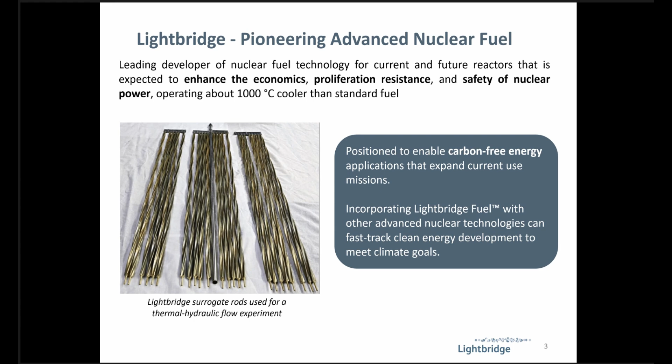This is a much more proliferation-resistant fuel that will matter for deployment in numerous countries around the world. It will improve the economics of the SMRs. This fuel will run about 1,000 degrees Celsius, about 1,800 degrees Fahrenheit cooler down the center line of the fuel than current fuel in reactors, and that relates to some of the very significant safety advantages that the fuel will bring.

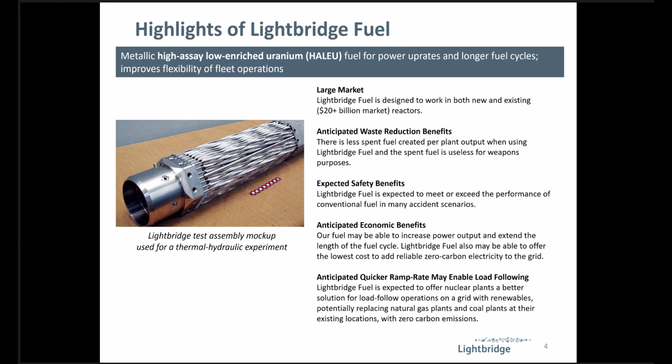This is a picture of a mock-up of a fuel assembly. We are designing for many different types of reactors. This is for a Russian VVER type reactor, a variant of a pressurized water reactor. And the fuel rods are optimized for each different kind of reactor. So for example, on this next slide, you can see one of the rods we designed, and this went through some testing. Now, this is a cross-section of one of the rods for a VVER, where we have 3 lobes. For a PWR, a Western, say Westinghouse type reactor like Seabrook, this would have 4 lobes instead of 3, would look more like a plus sign.

One of the many benefits that we've designed for is no spacer grids. So to hold the rods together in the core of the reactor, there are no grid straps, no spacer grids that block the water flow. So that is what's partly responsible for the power increase, that the water just flows much more unimpeded up from the bottom through the top of the fuel assembly and around again.

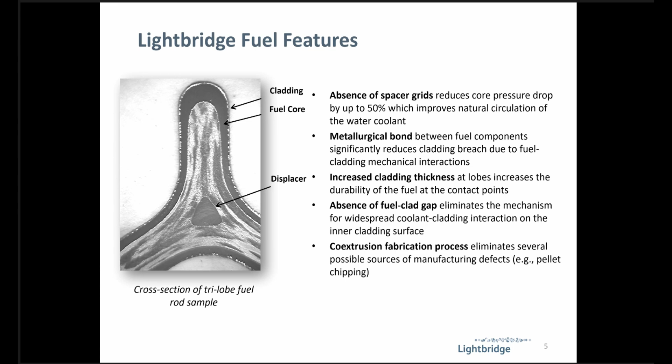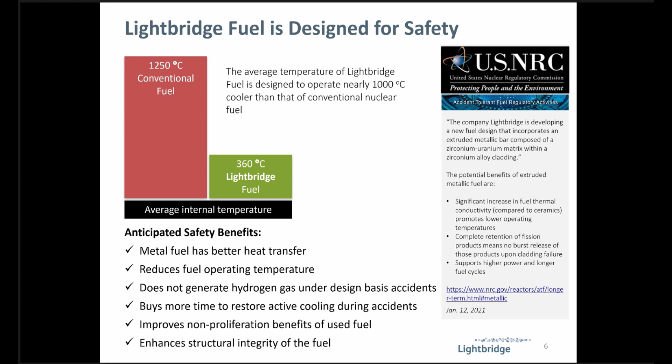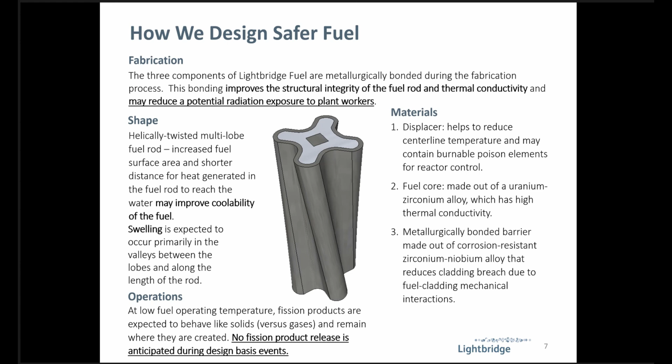We have designed the fuel and patented it. We've also designed and patented the manufacturing methods for this fuel. I'll only pick out a few things on each slide, and we'll get to your comments, questions later if there's anything you want to focus on.

As you know, the capacity factors are very different for different energy sources. The renewables are quite intermittent as the wind blows and the sun shines. Nuclear has the greatest capacity factor. You know, think of capacity factor as if the plant can run at 100% of the time, 24 hours a day, every day of the year.

Fleet-wide, nationally in the United States, nuclear is about 92.7%. Some of the reactors are over 95%. And virtually all of that downtime is planned years in advance for the spring or the fall when power isn't needed as much and the reactors can be refueled and have maintenance on them.

But the utilities want to increase these capacity factors more, including the ones that we've been working with. And by lengthening the fuel cycle and by actually with this fuel allowing a much quicker ramp up from an outage to full power and a much quicker ramp down that you can't do with the pellet and tube fuel that goes up and down in power very slowly, this also increases the capacity factor of the reactors by getting it up from that outage so quickly and then back down into the next one.

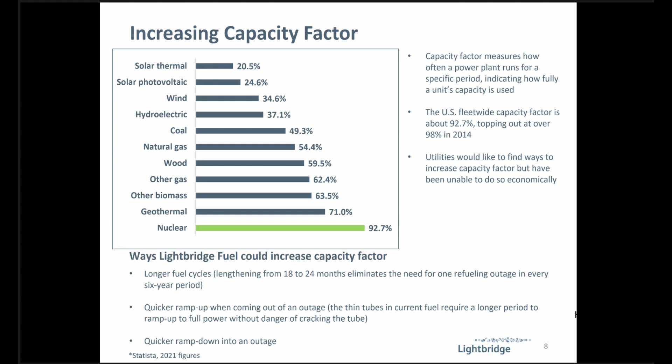And the next outage will be 24 months later instead of 18 months later. So the reactor is running for quite a bit of time that it would have been shut down for an outage. Some of our recent fuel development milestones are really centered around that. If you want to get ahead in nuclear in the United States, you really need to partner with the US government to access facilities, materials, and receive funding support.

And we announced in December a long-term strategic partnership project with Idaho National Laboratory and the US Department of Energy. We are now manufacturing fuel coupon samples that we will irradiate in the Advanced Test Reactor at Idaho National Lab, and the data will support the fuel performance modeling and regulatory licensing efforts at the Nuclear Regulatory Commission, as well as at nuclear utilities and fuel fabricator companies.

And under this work at INL, there's just about every quarter a new milestone being announced by Lightbridge, and this is leading to other developments on the commercialization path to the fuel.

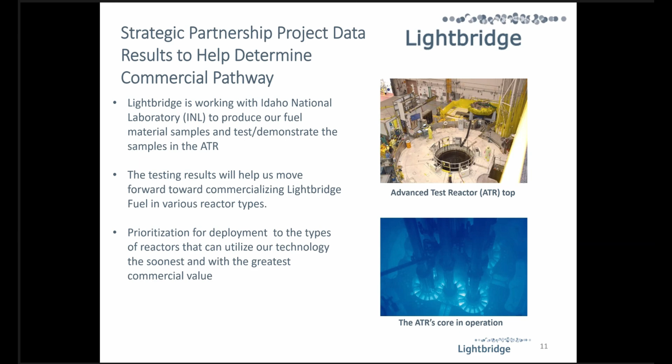The fuel can be used in all the variants of pressurized water reactors, boiling water reactors, and as we're going through this testing program at the Advanced Test Reactor and also at the TREAT reactor for transient testing, including accident type testing, that's helping to guide the commercialization path of which types of reactors exactly first and which reactors even within those groups are being prioritized for first commercialization.

So the top photo here is the canal at the Advanced Test Reactor, and paths that will come from this are the pressurized heavy water reactors like CANDUs, the small modular reactor, light water reactors, both pressurized and boiling water reactors, and the existing large reactors and new ones being built in several countries. And they all have advantages for why this fuel might go into them first.

For example, to use the fuel in the CANDU reactors, we would not be using HALEU. We'll use enrichment of uranium higher than the CANDUs now use, but not high assay, low enriched uranium. So for CANDUs, we don't have to wait for commercial supply of HALEU. We will bring the benefits of HALEU and advanced technologies to the light water reactor, SMRs, and the large existing reactors, but that supply of HALEU is not commercially available yet.

But the US government, working with allies, is very seriously working towards solving that problem and having more enrichment in the US and in allies available in the coming years. And in particular, there's a demonstration project at Centrus in Ohio happening now, another pure-play nuclear publicly traded company, and Urenco at their plant in New Mexico is adding 15% to their enrichment capacity, and they're looking into adding more capacity in their European plants. I'm glad to see the West addressing a lack of enough uranium enrichment now that we either can't access Russian supply as much or don't want to.

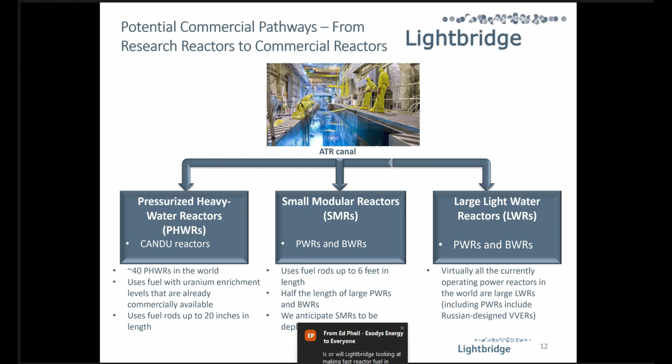One of our new and growing collaborations with the US Department of Energy is that we have a nuclear energy university program grant of $800,000 from DOE to MIT, under which MIT is studying accident-tolerant fuels for light water-cooled small modular reactors and is specifically looking at simulating the performance of Lightbridge fuel for NuScale's SMR. And we're collaborating with NuScale and with MIT together on this.

And the analysis is looking at promising advanced fuel forms to improve the safety and economics of light water reactor SMRs. And we're glad to see MIT, DOE, and NuScale all recognizing Lightbridge fuel for that.

We have a second new nuclear energy university program grant from the DOE as well, $1 million to Texas A&M University that we announced about a month ago, that will also simulate Lightbridge fuel in NuScale's SMR, and more specifically looking at the pressure drop correlations I mentioned at why the Lightbridge fuel will improve the economics of SMRs, we believe, quite dramatically. And this program also helps train the next generation of engineering students to use advanced multi-scale, multi-physics simulation tools. And we're glad to see them learning that in relation to Lightbridge fuel in a NuScale SMR.

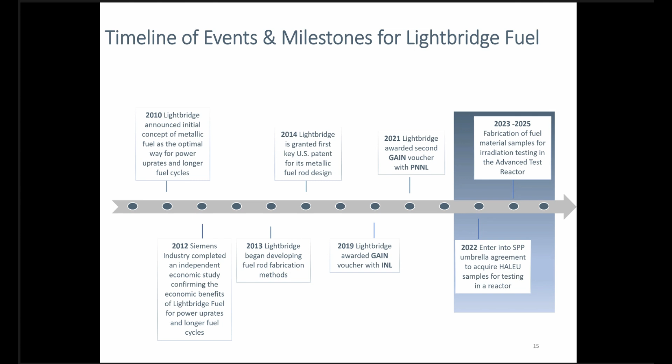to advance nuclear technology. And Lightbridge, we believe, supported by the DOE and its national labs, will play a significant role in the global energy transition, really helping the SMRs and the existing reactors powered by this new fuel meet their potential. And the Lightbridge fuel will bring to these SMRs the same benefits that we bring to large reactors, but we believe, and this is what some of the studies going on now we think will show, that the benefits to SMRs will be even greater, including for those pressure drop reasons. A lot of SMRs don't rely as much on the power of large pumps as on natural circulation, and not having spacer grids and grid straps and easier water flow, we think will make the Lightbridge fuel even better for SMRs than for the existing large reactors.

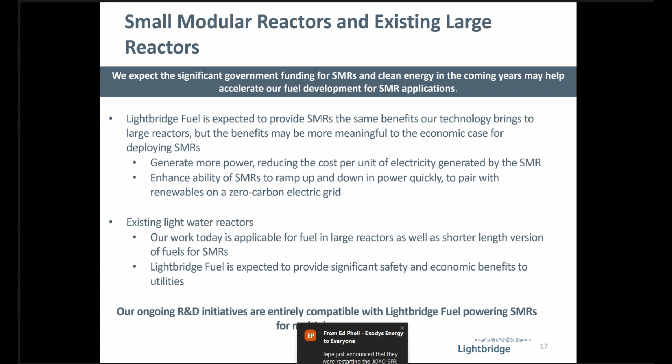But we're glad to see, I think in some surprising ways, more large reactors being ordered and built in the world than a lot of people had expected. I think it's not going to be just SMRs going forward, although that might be the case in the United States after the next Westinghouse plant at Vogtle, the next AP1000, opens a few months from now. There might not be another new large LWR built in the US for a long time, but I think there will be in many other countries, is what we're seeing, as well as the SMRs here and abroad. And we expect to bring our benefits to those plants.

The small modular reactors, including this image from NuScale of its VOYGR plant, we think really have the potential to be deployed in very large numbers. And these include the SMRs being developed by GE Hitachi, soon to be GE Vernova, as well as Holtec, and others that are developing light water reactor SMRs. And we're carefully following what they're doing, making sure that our fuel is being designed to bring significant benefits to these types of SMRs. Lightbridge is not designing a reactor. Lightbridge will not deploy a reactor. Lightbridge is just about designing and manufacturing fuel.

And we are looking into manufacturing these fuel rods ourselves, although we could also license the technology to companies in other places, or we could potentially produce fuel rods ourselves that are then assembled into fuel assemblies and fuel bundles by existing fuel fabricators that might want to have their own IP on the top plate, the bottom plate, other aspects of the fuel assembly beyond the fuel rods that Lightbridge is designing.

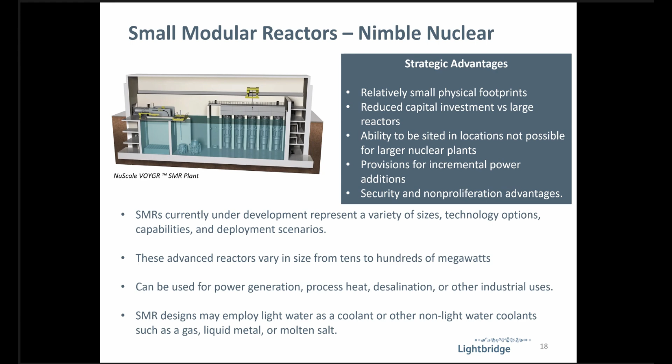And I think that there's sort of a rollout. No one is sure of the chronology, and some of these will overlap with each other, and many different reactors within each group will be different. But the existing reactors are kind of unique in that they're an existing market of about 400 reactors around the world that could use Lightbridge fuel. If you're developing a new advanced reactor, you don't have anything around the world that could use your stuff. You have to have a new reactor built. Lightbridge has a big existing potential market as we qualify this fuel.

And then going into the light water reactor SMRs like NuScale and the GE Hitachi BWRX-300 and Holtec and Rolls-Royce and other SMR developers, we think that because these are pressurized water reactors and boiling water reactors have a lot of existing supply chain, the regulators like the NRC understand light water reactor technology, that I think these will be deployed in larger numbers sooner than the next category of the advanced reactors that are being developed by companies like TerraPower and X-Energy and Oklo and others, and we look forward to seeing these plants as well. But I think having large numbers of those deployed around the world with regulators understanding them will probably take longer than the existing light water technology that has been licensed for over 60 years.

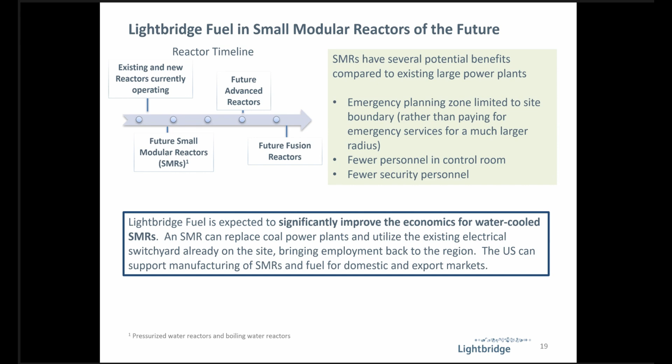This ramp rate for SMRs can be very important for points other than just economics of coming out of an outage quicker and going into an outage quicker, and therefore having more revenue from selling more power. That right now reactors are terrible at load following for a lot of reasons, including that the pellet in tube uranium dioxide fuel really can't surge down in power or surge up in power quickly. You'll crack that fuel rod if you surge it up in power quickly. But we believe we'll show that you can with Lightbridge fuel and in an SMR plant where the other systems are designed to take those increases and decreases in power. And we've already done some things that give us great confidence that this will be the case.

So, we'll talk a little bit more in the next couple slides about coal to nuclear, but really we're also getting to natural gas to nuclear. That if we're really going to have an energy transition and get off emitting CO2, the natural gas plants are going to have to go eventually too. And right now, one of the biggest drivers for natural gas plants is backing up renewables. In fact, in a lot of places with renewables, there's more power provided by natural gas than there is energy provided by renewables because of the intermittency.

And if we're going to get to zero carbon grids, I think we'll eventually see SMRs replace those natural gas plants, with Lightbridge fuel really being a key, because unlike the current fuel the SMRs could use, the Lightbridge fuel can surge up and down in power quickly, like the gas plants can, as the sun doesn't shine as much and then comes back from behind a cloud, or the wind doesn't blow as much and then comes back. And the SMRs could really go up and down in power and load follow on a zero carbon grid with renewables like natural gas does now.

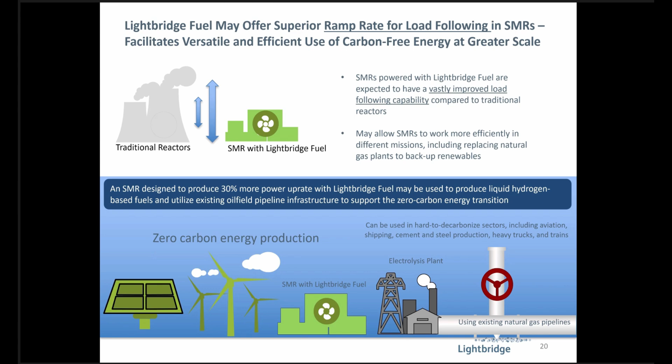And this coal to nuclear transition, and that I think also will lead to natural gas to nuclear transition, is very interesting. The Department of Energy published a study in September that showed 80% of the retired coal plants have the basic characteristics to serve as sites for SMRs. 190 sites around the US. If you put an SMR on each, that will be almost 200 gigawatts of electricity, which is twice as much nuclear energy as produced in the US today. So if we put an SMR on each of these sites, it would triple the amount of nuclear energy in the United States. It would be a great market, we think, for Lightbridge. And it would really help with decarbonization.

We talk about infrastructure on these sites, and sure you've heard these from many others as well. There's the electrical switchyard, there's the connection to the electric grid, there's not the need to build new transmission lines like there is with renewables. There's a great opportunity for savings of putting a new energy source on a coal plant site or any fossil fuel plant site and using that infrastructure. And as SMR designs come along, there could even be SMRs that use the existing turbine at the coal plant and generator at the coal plant, in addition to the electrical switchyard and the grid connections there.

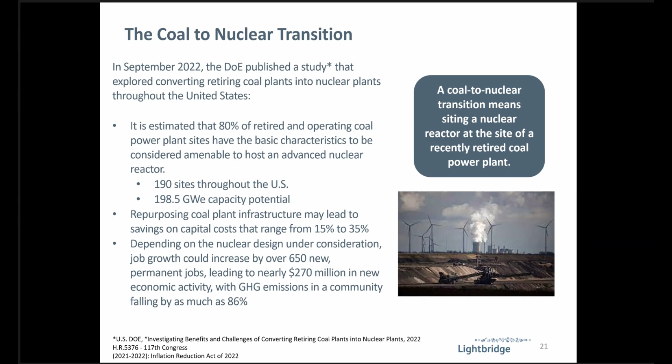We believe there are compelling economics around Lightbridge fuel. There are about 419 water-cooled reactors around the world that we believe could use our fuel that are operating now. 93 of them are operating in the US.

When we think about this in terms of levelizing to, say, a standard plant of 1,000 megawatts, a gigawatt, you could think of that as about 100 of those in the US out of about 400 in the world, with about 400 gigawatts electric in the world. And the annual fuel spend for a reactor is about $40 million. So the total US addressable market is about $4 billion in fuel spend per year. And worldwide is about $16.7 billion a year in fuel spend.

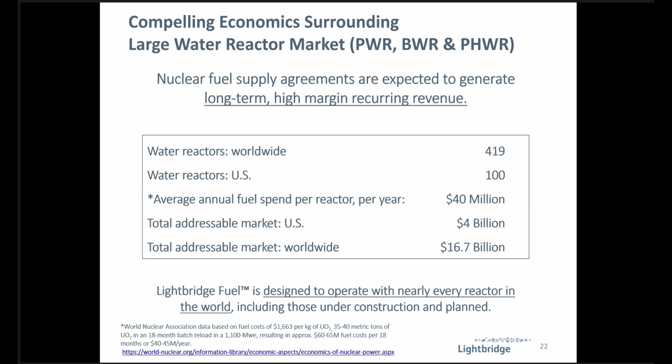And we think that's something that will rise quite significantly if nuclear is to meet its place in helping with the energy transition. These numbers derive from a study that Siemens did through its subsidiary Pace Global and some analysis from Lightbridge on what a typical 1,100 megawatt, like Seabrook Westinghouse four-loop PWR would benefit from using Lightbridge fuel. And this is using the wholesale power price looking back 10 years, the average over the last 10 years. That'll vary by place, by time, but that's what this is based on.

Lightbridge fuel can be used in many ways. You could uprate an existing reactor by 17% and not lengthen the fuel cycle, or you could uprate the plant by 10% and increase the fuel cycle from 18 to 24 months. On a new build PWR, you could increase the power output by 30% for the same size core with Lightbridge fuel. So these numbers are based on a typical 1,100 megawatt electric Westinghouse type four-loop PWR that's uprated 10% and has the fuel cycle lengthened from 18 to 24 months. And this is where most of the utilities tell us their interest lies.

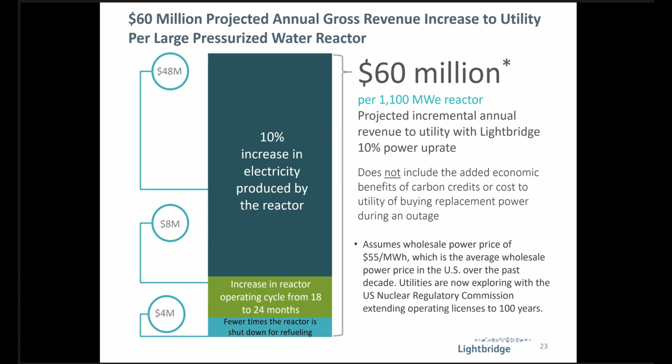So we think the economic benefits of Lightbridge fuel can be quite significant and provide the utilities with what they're looking for to help keep the existing reactors operating and profitable and justify the case for deploying large numbers of SMRs, where we believe these benefits will scale down from here, but proportionally be even better than for the large reactors.

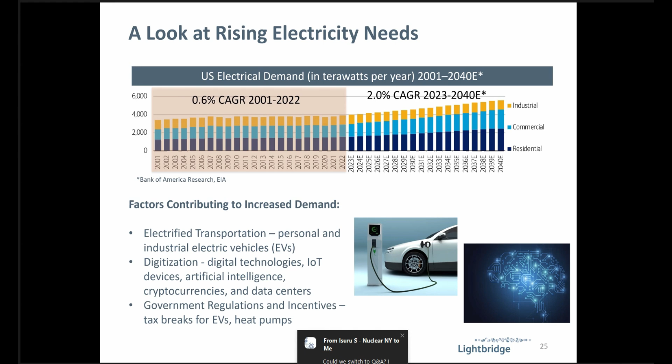And the world, as you know, is having increasing demand for energy. The demand is coming from many sources for electricity use. It's coming from the switch to electric vehicles. It's coming from data centers. It's coming from AI. It's coming from tax breaks and other incentives to switch to electric vehicles and other ways that decarbonize. And I think that nuclear power is going to be essential. We will not meet this increasing electricity demand without nuclear power significantly increasing, creating a great opportunity for Lightbridge.

How much will nuclear power increase? Well, the Nuclear Energy Institute says that globally we'll go from about 400 gigawatts electric of nuclear power today, add 800 gigawatts to that, to about 1,200 gigawatts by 2050, a tripling of nuclear power in the world. Our estimates from looking at what the International Energy Agency and others are projecting for global energy needs by 2050 show that we're going to need 15,000 gigawatts electric, if not more, of new clean energy in the world by 2050. And if nuclear were to provide a third of that, that would be 5,000 gigawatts.

That would be the equivalent of 5,000 large reactors added to the world by 2050, or a lot more than 5,000 small modular reactors. Now, what will the number be? Will it be 800 large reactors equivalent? Will it be more? Will it be less? We don't know, but we think there's a potential for it to be tremendous, far greater than the NEI projection of 800 added gigawatts electric.

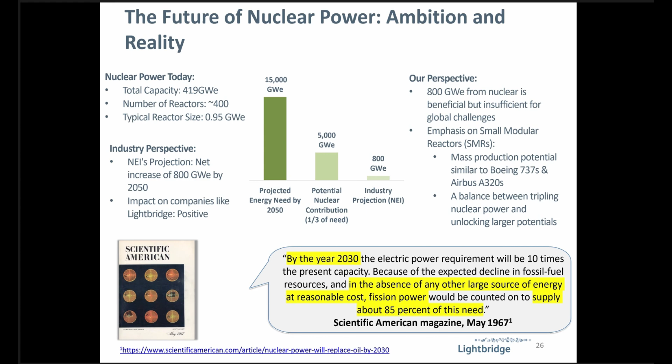And how tremendous? Can we get into the thousands or more? I think we can. In 1939, the US produced fewer than 3,000 military aircraft. On December 7th, 1941, we were about at that pace when Japan bombed Pearl Harbor. And the next day, the US entered World War II. And leaders of Japan and Germany were shocked.

They did not expect that US industrial capacity could ramp up so quickly on such a complicated thing to make. The airplanes in the US went from being hand-built by craftsmen to factories, assembly line production, in some cases using Ford Motor Company sites that had assembly lines and made cars that were converted to aircraft. We produced in the US over 96,000 military aircraft in 1944, the last full year of World War II that ended in '45. We produced over 300,000 military aircraft in less than 4 years.

Just mind-boggling. So fast, such large production, and really with such quality of the aircraft that went to Asia and to Europe from the US. These aircraft are about the size of SMRs, of the reactors in the SMRs. They're about the size of a NuScale SMR unit, a NuScale module.

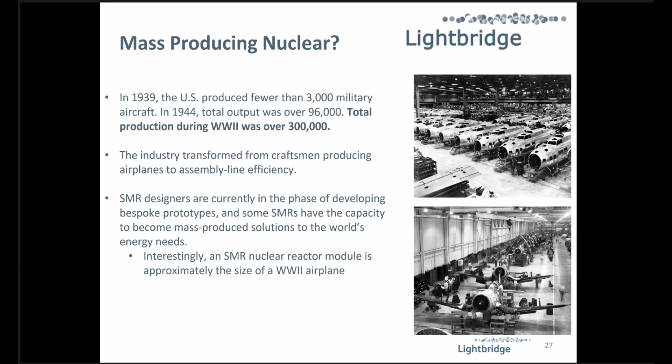And I just think it's quite possible that as the energy transition is shown to be more and more pressing for many reasons, including the indicia that everyone is experiencing from climate change, there's going to be a tremendous opportunity for companies to mass produce SMRs as they get through their initial demonstrations that DOE is funding, and then have customers lining up to buy units.

There's also bipartisan support for advanced nuclear energy that Lightbridge and other nuclear companies are taking advantage of. Some of this is being driven by Russia's invasion of Ukraine. Some of this is being driven by climate change. We're seeing governments in many countries and organizations comprised of governments moving very quickly, from the European taxonomy to the UK, to Japan opening reactors that have been closed since the Fukushima accident and building new ones,

the Inflation Reduction Act in the United States, the bipartisan infrastructure bill, just real, meaningful, massive amounts of money being made available by DOE, and Lightbridge is very happy to receive some of that in supporting our project. This advanced nuclear technology race, among a lot of others that are producing new reactors and Lightbridge for new fuel for reactors, really poses unique opportunities for us.

And the government is looking at critical infrastructure resilience through nuclear and small reactors, for military bases that couldn't be cut off if the grid were taken down through a cyber attack, and critical national infrastructure, like data centers that should be taken off the grid and put on bespoke, reliable power sources like SMRs. And the government is looking at 100-year relationships with other countries that the US can supply reactors to.

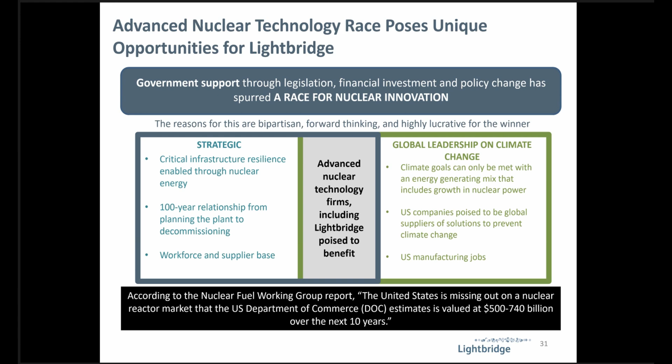The Nuclear Fuel Working Group report that I had the honor of working on a little bit with people in government had said the US was missing out on an opportunity of $500 billion to $740 billion over the next 10 years, and that was based on what the Commerce Department said. But now the government is really stepping up to make sure that doesn't happen. And the US has a significant role to play internationally in nuclear. And I think we've got a real chance to do it. And Lightbridge fuel can be a real part of helping.